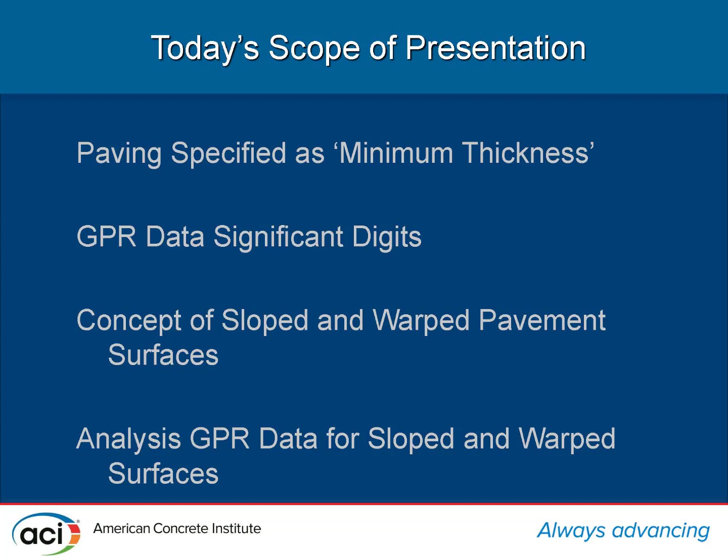Some of our other presenters are going to introduce the concept of slope paving and warp paving in our work, and some definitions. ACI 117 has actually got some proposed definitions for that new type of pavement classification. Then I would like to close in the latter third of my presentation with some analysis of GPR data and how it relates to slope paving and warp paving surfaces, complementing some of the future presentations.

As any other contractor, I've got a presentation with qualifications. We've got a bunch of weasel words here that I created. I narrow my subject matter to privately developed projects, so that we're not looking at something in the public sector, but the private sector, so that we've got fire lanes and traffic lanes and a nominal amount of truck traffic, the dumpster truck once or twice a week, and parking areas. We exclude the concept of terminal parking that we see at some big distribution centers, or public streets or interstates.

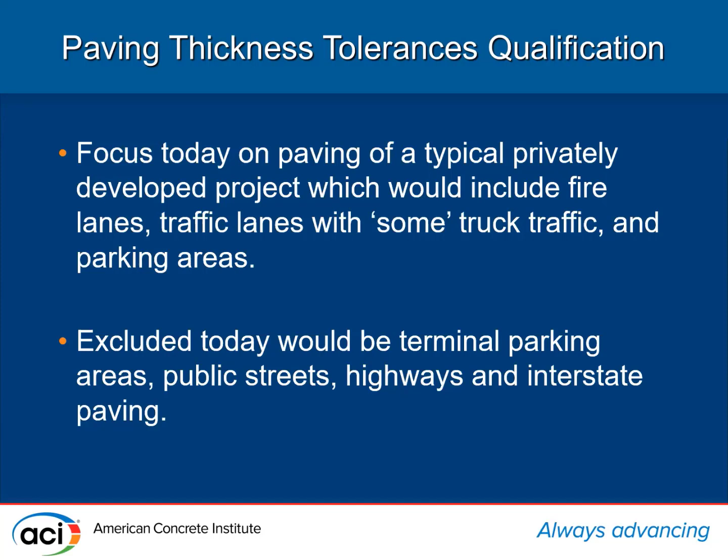On the design side of things, we always start our projects out with a soils engineer that does a soil analysis, using software like pavementdesigner.org, for example, that goes back to the PCA method, the AASHO research, AASHTO research that occurred in the 50s. That soils engineer will present recommendations in his documents that'll eventually get followed into the for-construction documents by the civil engineer.

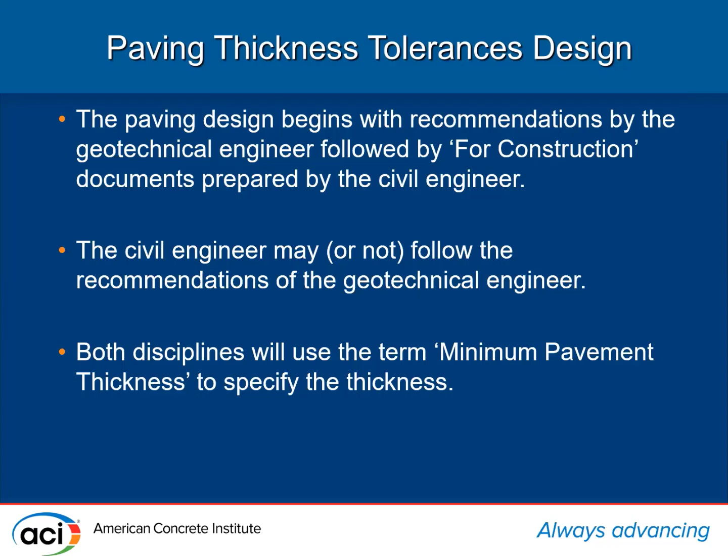But both disciplines will use the term minimum pavement thickness. This minimum pavement thickness concept goes all the way back to the AASHTO research, where in paving, we don't have our factors of safety that we normally have, say, in a structure that's designed under the reinforced concrete code of 318. And so that's where that term comes in.

And these licensed design professionals, we look at our service lives that we have in our industry, and as long as we execute the work properly, the designer is designing for a 20-year service life. And the reality is our service lives are easily 50 or 60 years.

The data that I'm presenting here, when you take into account the proper K value and the actual strength of the concrete, the service life exceeds 50 years.

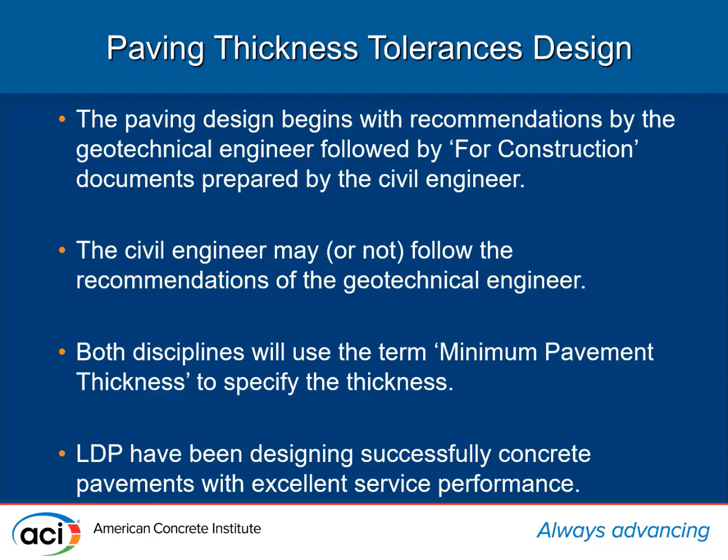So we're presenting some things that might be a little scary to the design professional about pavement tolerances, but the reality is we are merely reporting the existing tolerances that are out there today. Even though we're using minimum pavement thickness and we're not achieving that technically, the reality is we have great service on our pavements.

So pavement thicknesses, the tolerances themselves, the civil engineer and the soils engineer may or may not address in their documents what the tolerance is. They casually mention minimum thickness and don't call a lot of attention to it.

The contractors typically will assume, in the industry, that for a 6-inch pavement, the ACI tolerances apply. A more sophisticated contractor is going to immediately send in an RFI to confirm that. And sure enough, most design professionals would say, of course, the tolerances apply.

Sometimes the specifiers will refer to ACI 117 in their documents, their notes on the drawings. Sometimes they will, but not very often. The civil engineer normally won't refer to an ACI document historically, but maybe the structural engineer will refer to 301. And when you refer to 301, you incorporate it into the design, into ACI 117. And when the architect issues his specifications, a lot of times those specs will read that follow 301, which incorporates 117. So in a roundabout way, we can get into 117, but clearly the RFI is the better route.

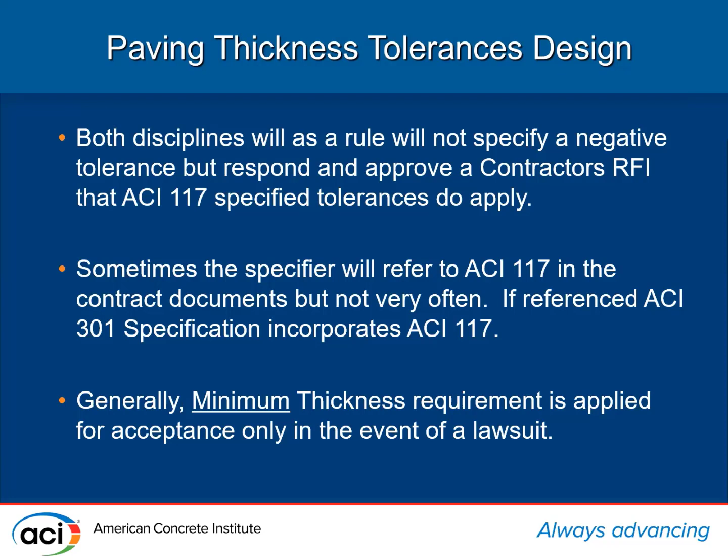But the only time that minimum thickness requirement is applied to the job is when they're involved with a lawsuit. Typically, the reality is that's the application.

As we walk through the design, the tolerances that are in there now that I'm going to present to you today are really judgment tolerances. We don't, in 117, if we look at the history of where these tolerances come from—some of the other speakers will address that—but we're really looking at a judgment that was made 15, 20 years ago on our tolerances we have now.

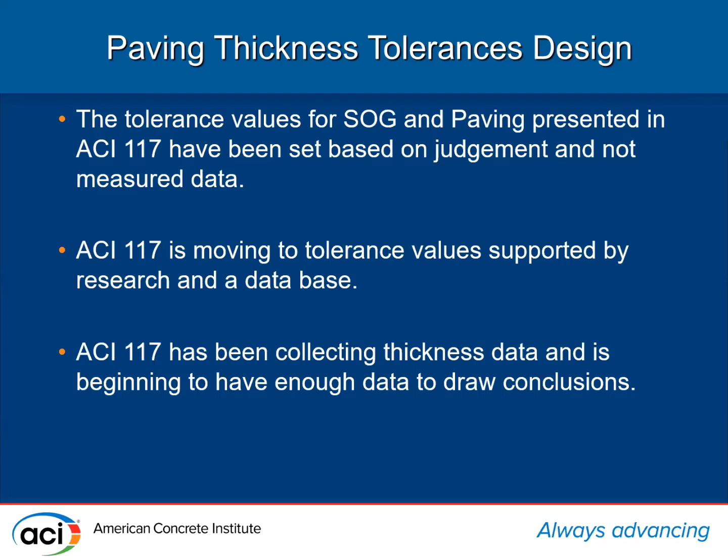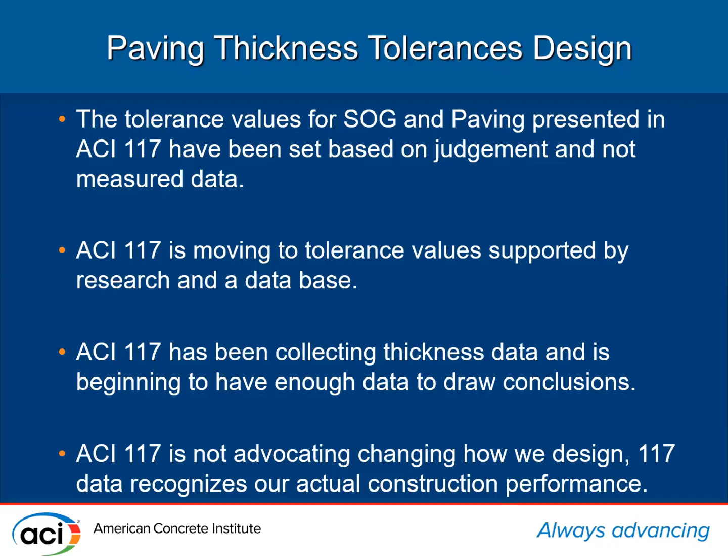Right now, the 117 committee is building a database, funding research, publishing documents so that we can publish what we really have been building. What are the real tolerances? We're moving in that direction. So today it's very important that we build this database and base our tolerances on the reality of what we can really accomplish. We are not in 117 advocating that we change how we design our pavements. We're just recognizing this is how we're actually performing out in the field with our products.

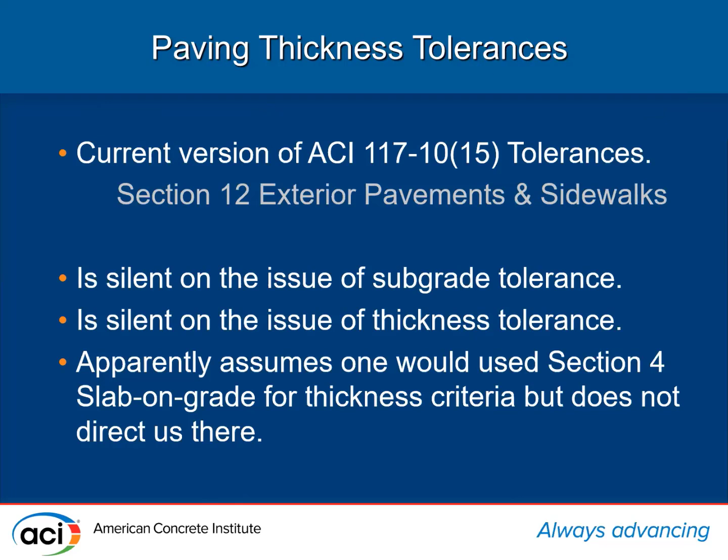Currently, 117's 2010 version was updated in '15, and section 12 addresses pavements. And you go to section 12 and it's silent on the subgrade tolerance. It's silent on the thickness tolerance, and apparently assumes that we should be using the slab on grade tolerance, which is in section 4. To help clarify things, ACI Committee 330 has a specification on pavements and parking lots, and we go to that specification and they hit the nail on the head, clear as a bell: go to section 4.5.4 to get your pavement tolerances, and 4.5.4 is the slab on grade tolerance.

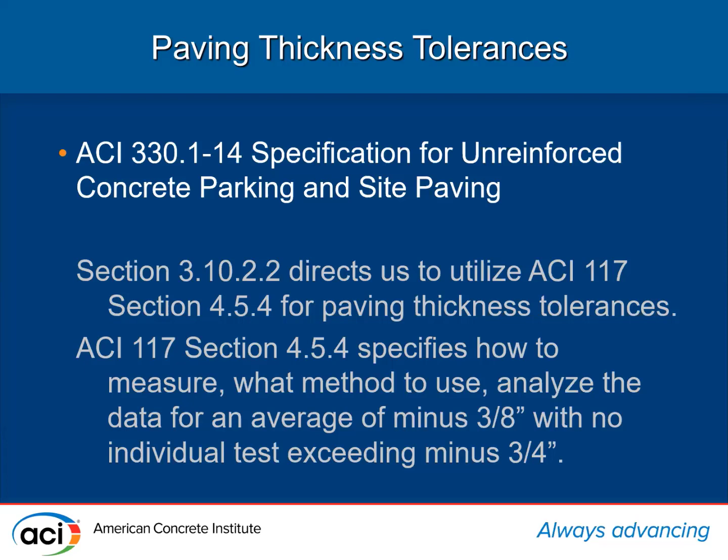It tells us how to measure, how we analyze it, how we collect the data—that it's the average, and all points have to exceed minus 3/8 of the design. In my example, that's going to be, they're going to have to exceed 5 5/8 inches. And each individual test has to exceed minus 3/4 inch. In my example, that would be have to exceed 5 1/4 inches. So that helps us see it.

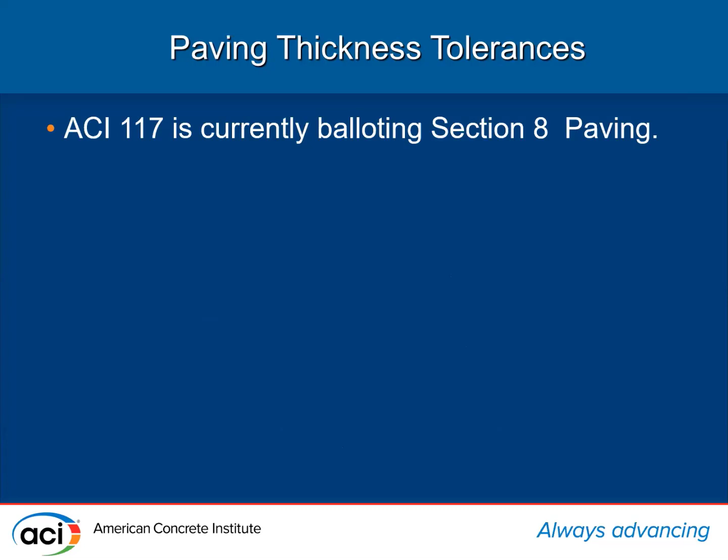In the future, we're updating the new section 8, which will be paving. It'll be clear as a bell. I guarantee you that we will address how to measure the thickness and how to analyze it. It'll be using the same process that we have been using now on slab on grade. And we hope to have some new information in there as far as slope paving and warp paving, based upon the research you'll see today.

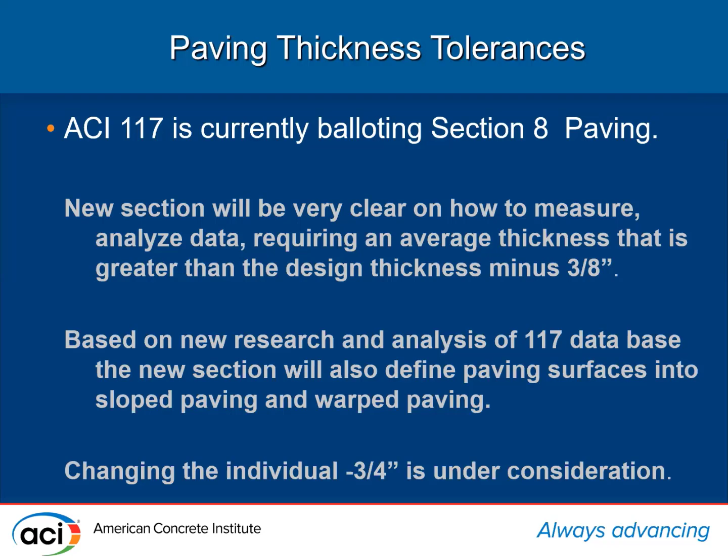And we were also going to look at possibly changing the individual minus 3/4 minimum, but we're not looking at changing the average thickness. That average 3/8 will maintain.

We have developed, on slope paving, the definition that's been balloted: the finished concrete surface and the corresponding subgrade sheet drain in one plane, one direction, very much like a gabled house—just one plane, one slope. The other balloted definition is warp paving: it's when our paving surface has multiple contours of the subgrade and the finished surface. And we're finding that being able to align that point in the subgrade exactly with that point in the paving surface is extremely difficult. You'll see that in the data today.

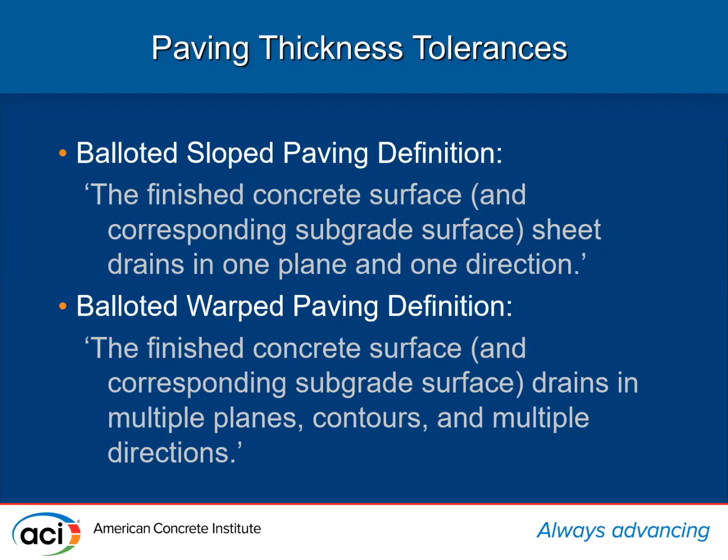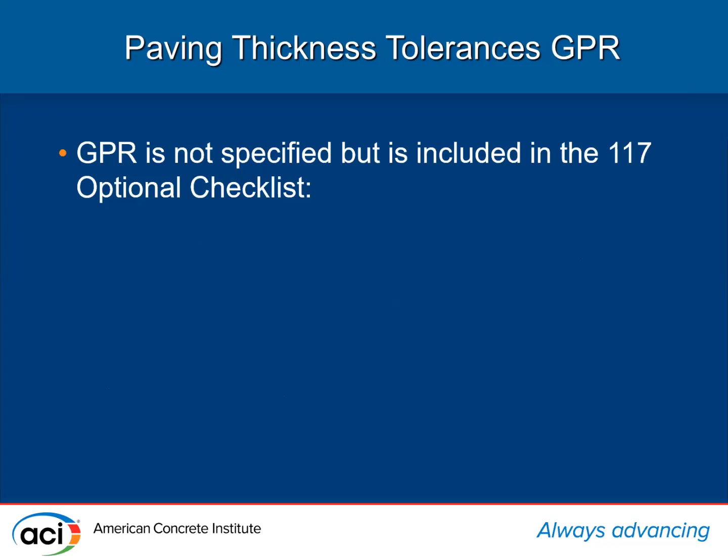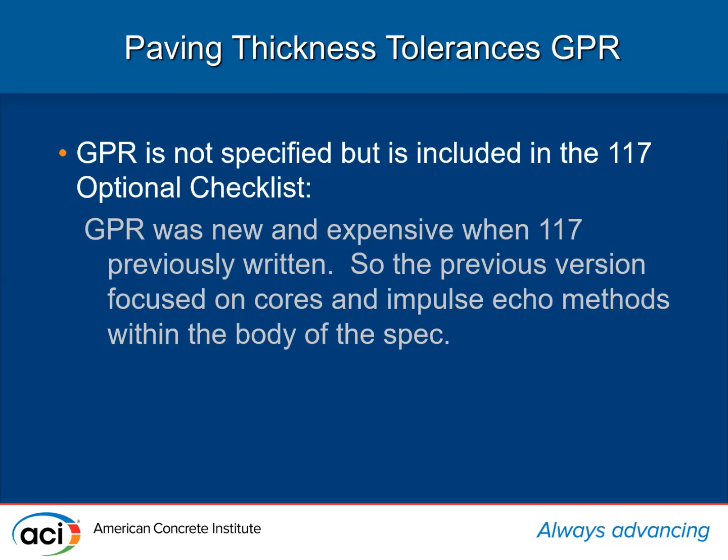Looking at pavement thicknesses as it relates to GPR measurements, ground penetrating radar—GPR is not used in 117 as an acceptable method to measure thickness. That's because 15 years ago, when 117 was published and written, GPR was fairly new, and the parameters and the equipment were expensive and the experience was limited. So that's why it ended up as an optional checklist item. But now GPR is a lot more economical. Anybody can get one for a few thousand dollars, or can even rent a device. It's the size of a Dyson vacuum cleaner.

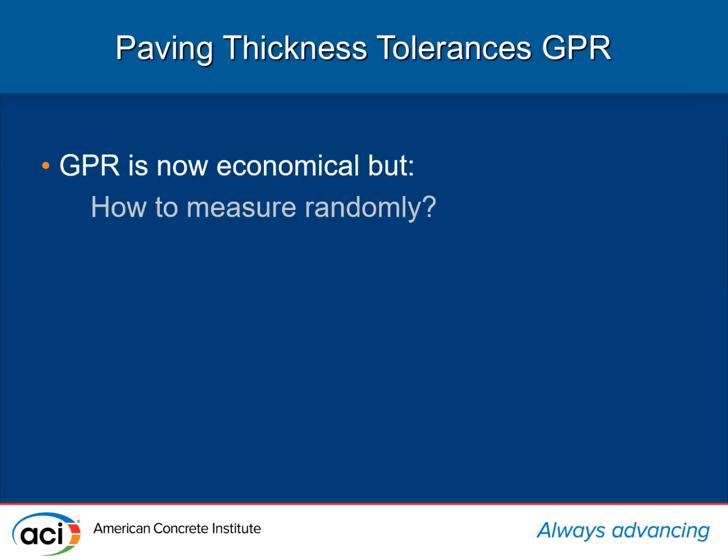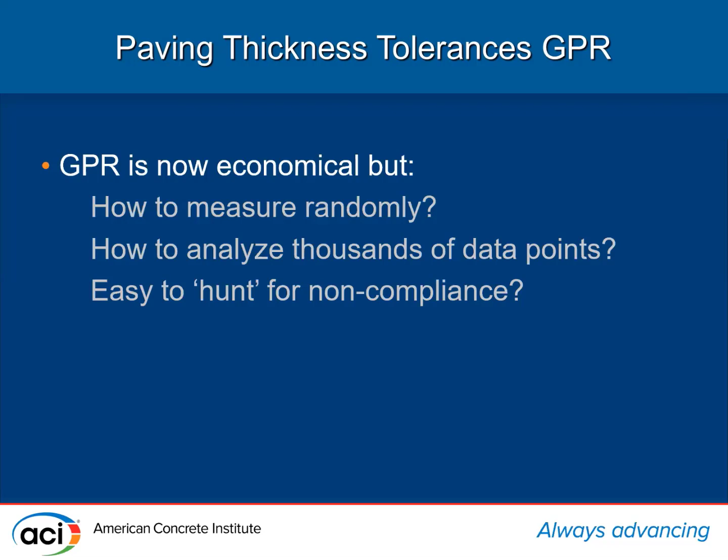But it brings up some issues: how do we measure randomly, which is part of the basis for the slab on grade measurements? How do we analyze these thousands of data points that we collect? It's easy for someone to hunt and find non-compliance and then develop their run to show that data. And then there's accuracy issues—the ASTM test procedure does not address accuracy or significant digits.

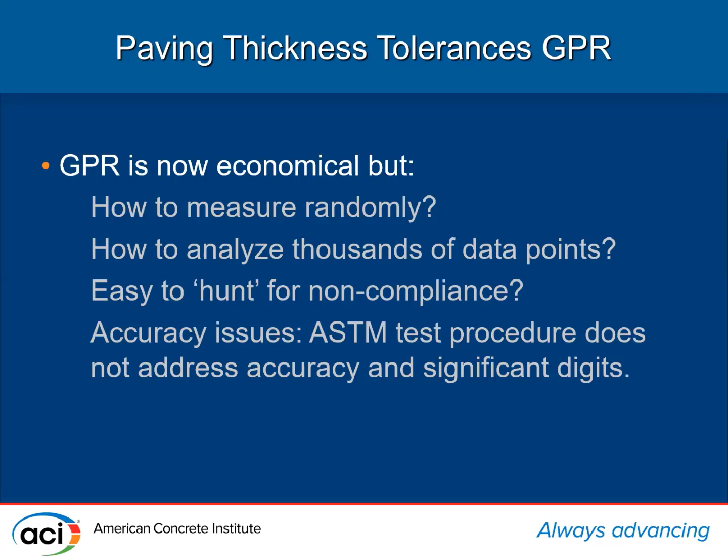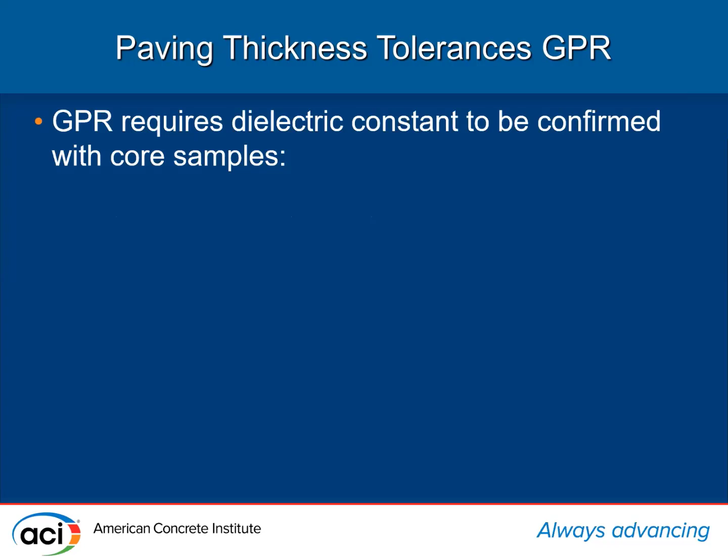Having been an engineer from 50 years ago in college, I will admit that I used my slide rule, but I didn't wear it on my belt. But one of the first things you study is significant digits. So that's important to me as I look at how we measure things.

In the case of cores, we measure cores and the ASTM test is very clear how to measure it—the number of measurements, the average of those measurements—and that we round up or down to the nearest 0.05 inches, which is a little bit less than 1/16 of an inch. So we know on cores that we're about 1/16 of an inch accurate. The ASTM for GPR does not tell us to what degree of accuracy we have.

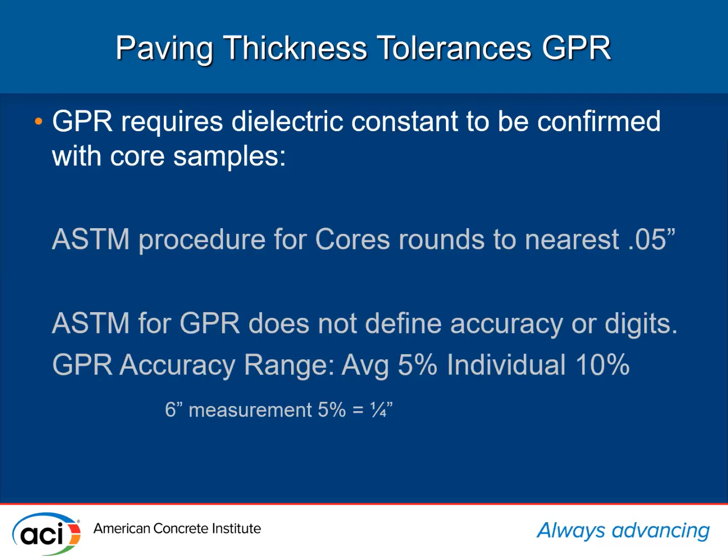The GPR accuracy range has to be reconciled with several cores, but the average is about 5%. It could be as extreme as an individual measurement being off by 10%. In a 6-inch paving, that equates to a quarter of an inch. So we go from cores at a sixteenth to GPR at about a quarter—a significant difference there.

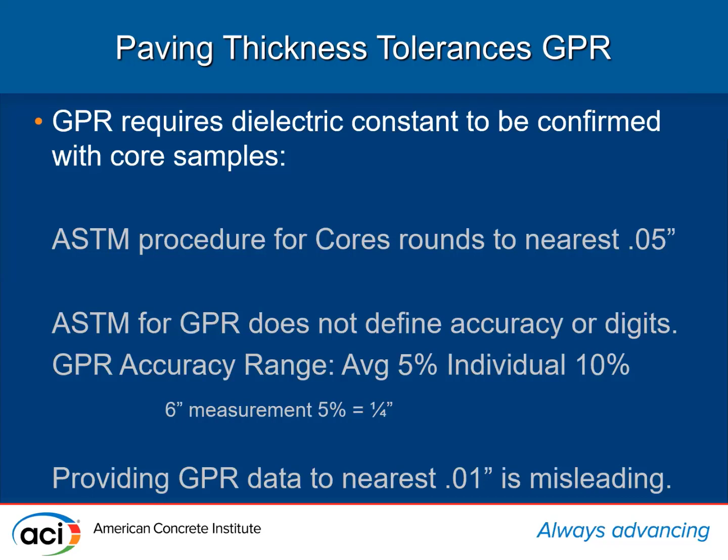When we provide data on GPR to the nearest hundredth of an inch, it's a little misleading. But rounding up GPR to a quarter or a half could be misleading too. I tend to use a tenth, just to have something in between the realities. So maybe reality is around a tenth for GPR measurements.

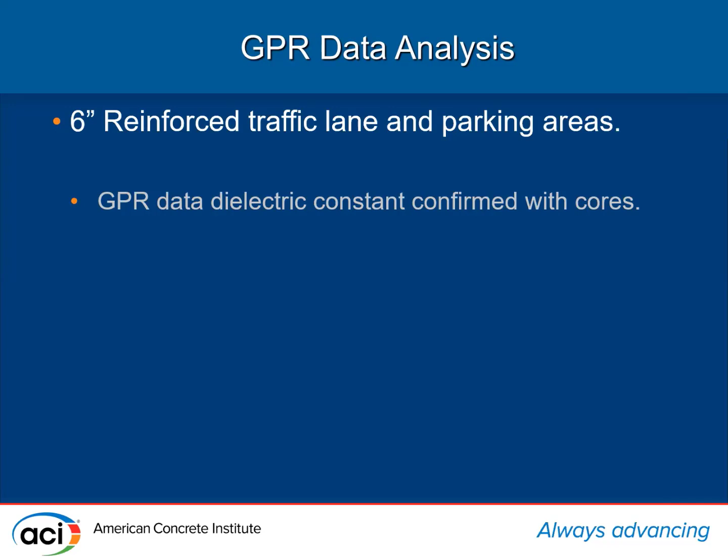I want to give you an example of some data that I was able to acquire on GPR. This is for a traffic lane and parking areas. We did confirm the dielectric constant with cores to calibrate our measurements.

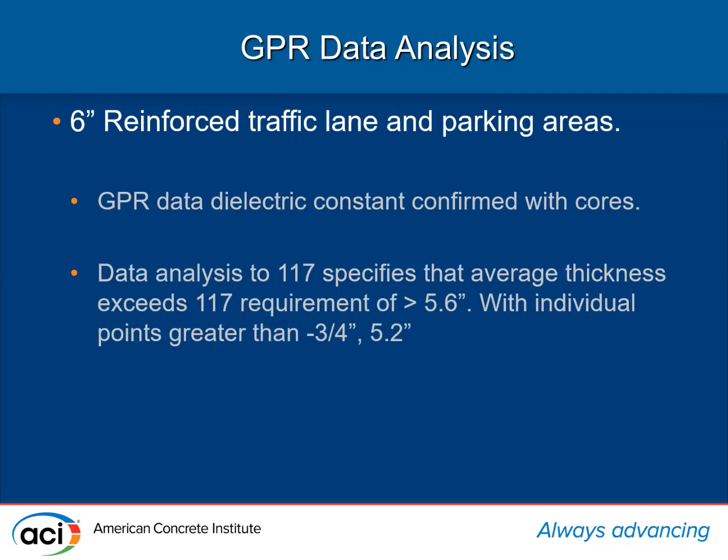With that analysis, the average thickness exceeded 5.6, and our individual points had to be greater than 5.2. You'll see in our example that we're able to accomplish the average, sometimes excessively, but the points on the minus three-quarter results are less.

Looking specifically at the slope paving, and I'm going to hit you with a bunch of data at once: we had about 473 data points that ranged in thickness from 4.2 to 9 inches. We had one odd one out there, really tall, but our average—and I use the term raw, unfactored—our raw average was 5.8 inches, and our raw standard deviation was 0.44.

Our modified 117 caps the extreme highs. If I have a 9-inch measurement, I have to reduce that value down to 6 3/4 inches. So with the ACI modified method, the data is 5.8 inches, and my standard deviation becomes 0.41. So we exceed the 5.6 inch minimum.

For individual numbers under the spec we currently have, with the tolerance at minus three-quarter, out of the 473 points, about 9% did not comply. If we look at a minus tolerance of 1.25 inches, about 20 points did not comply, giving about 96% compliance. And at a minus 1.5 inch tolerance, there were 4 points, for 99% compliance.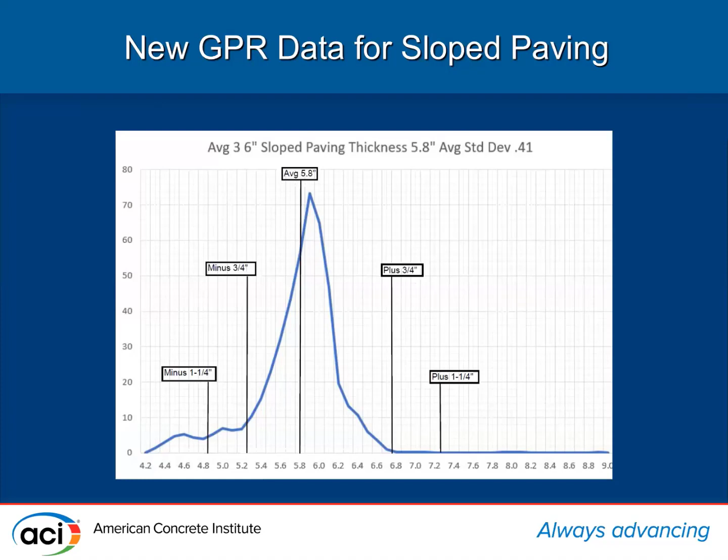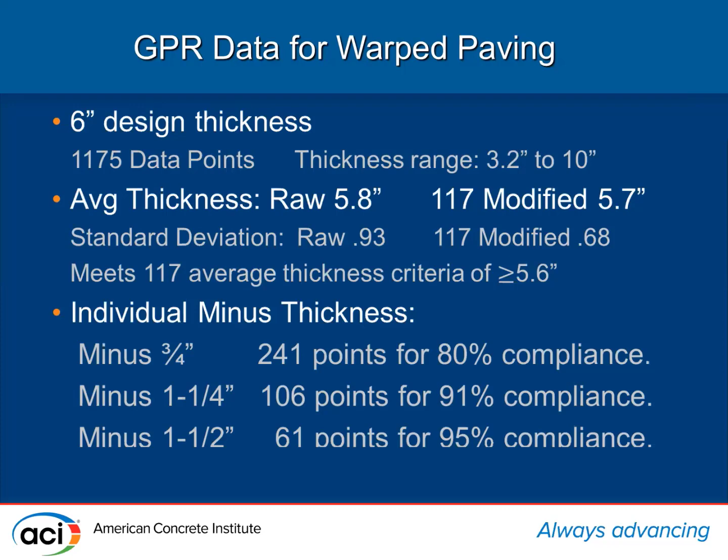Or about 1.25 inches. For warped paving, the numbers are a little more wild and crazy. Our averages are about the same, 5.8, 5.7 inches, but our standard deviations are significantly higher. As we look down in the minus data, all our percentages are significantly higher, and our bell curve shows and reflects that data as well.

Our conclusion is: for GPR to become more of a mainstream test method, we need to standardize the significant digits and the accuracy of the measurements, and we need to solve some of the questions on the randomness issue.

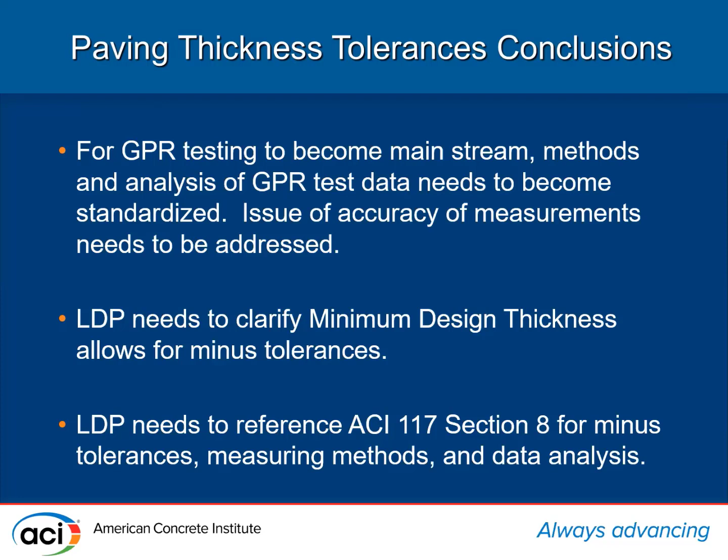The licensed design professional needs to clarify what tolerances we should be using, and clarify the minimum design thickness issue, and make sure we get those into our design documents that refer to 117. At the moment, 117 is looking at...

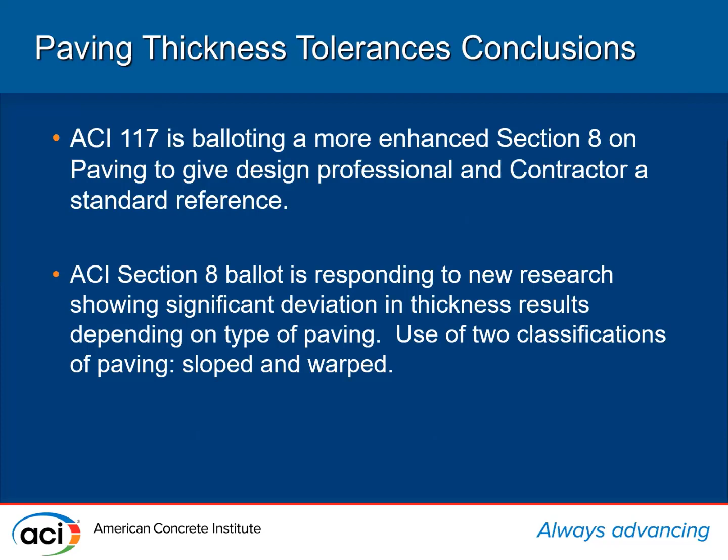Section 8 enhancement, to make it very clear that we do cover paving, and that we'll utilize the new research information and the new data that we're getting. At this point, we're looking at using the two classifications of sloped and warped paving.

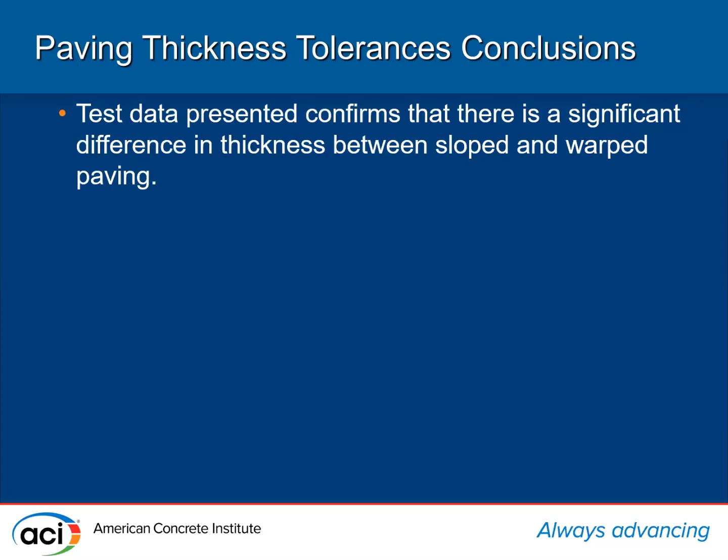As we see with this data, there's a significant difference between sloped and warped paving, which justifies those classifications. And what we're seeing today is actually the measurements of reality.

As we look at the service life of that pavement section, it actually exceeds 50 years, not the 20-year design life. We've started means and methods of how we can educate our designers and our contractors, and let's pay more attention to our subgrade, which is actually driving these tolerances.

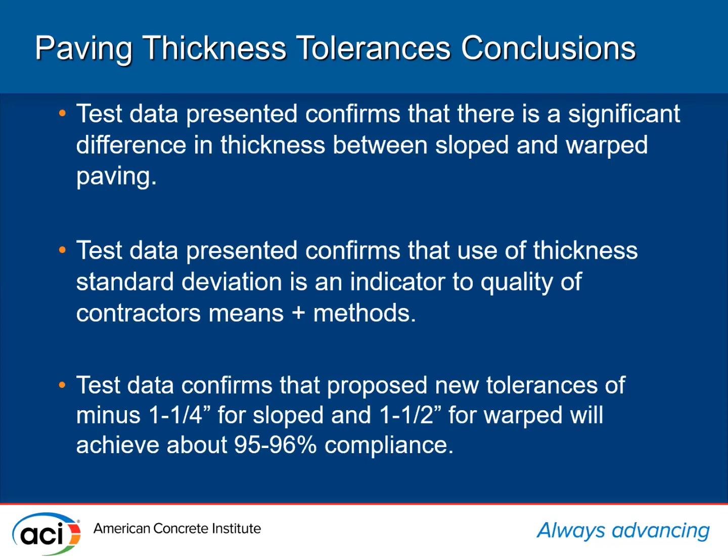As we look at our new tolerances, what should they be? And what should those values be? And where should we go with our compliance—are we looking for 95% or 100%? Maybe we need to address that in our 117 documents.

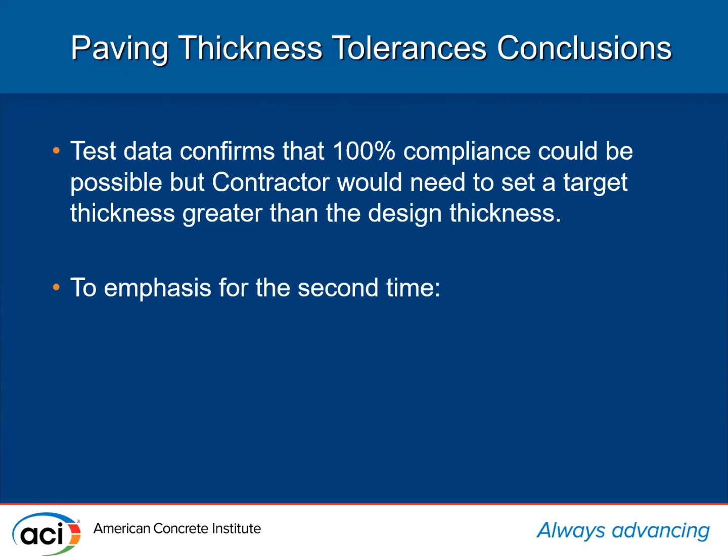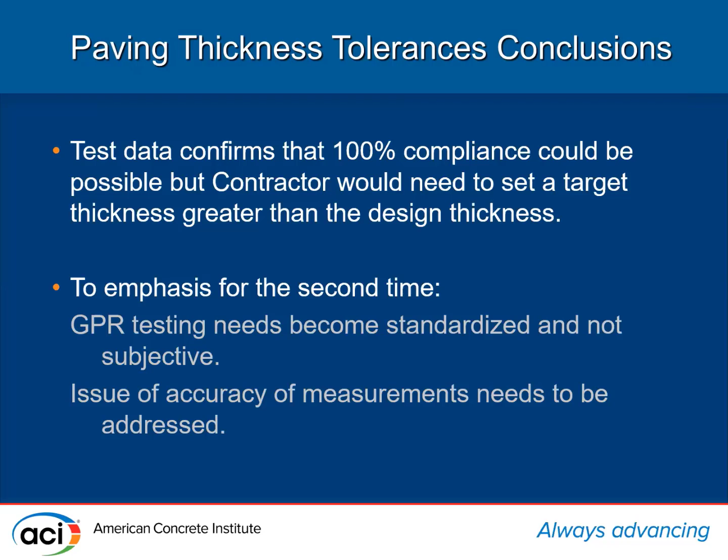100% compliance is possible, but we would need to start increasing our pavement thickness if that's what's desired. To emphasize again, we need to standardize the GPR and get rid of some of the subjectivity of GPR, and also address the issues of what measurement significant digits we should be using.